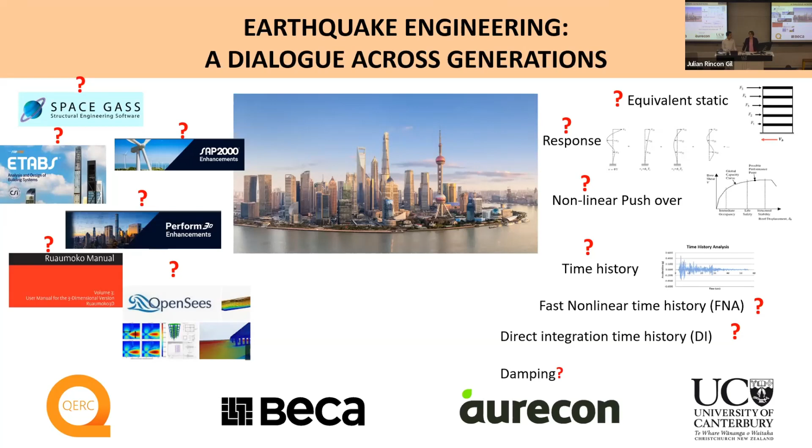There's one interesting thing here: it doesn't matter which method or software you choose for the analysis, at the end you can find a very nice, beautiful result. At first look you think, oh, it's stunning, it's great. It looks more accurate if you use a more complicated analysis. But I can say that it is scary, it is dangerous, because there is a chance that the first principle understanding was wrong. But because the results look beautiful and complicated, we think that it is correct.

So using software these days is essential, we need to use it. But the question is how can we make sure that we are using it correctly.

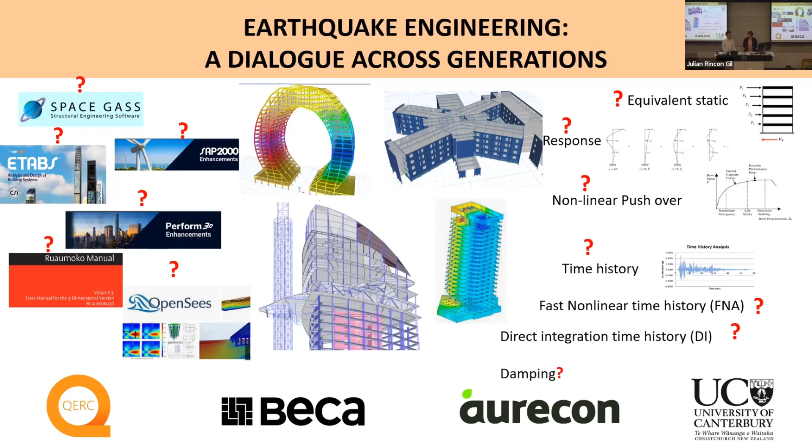So based on what Professor Paulay mentioned in his interview and what Niku just explained nicely, we want to open three questions to the panel and later for the audience. The first one is, as Niku said, no one can deny or question the role of computer software in today's earthquake engineering. But the question we need to ask ourselves is: have we equipped our engineers with the necessary knowledge and tools to properly use the software, but more importantly, verify the results and make sense out of them?

The second question, also tied back to the first, is I want to know what the panel thinks about these unconventional yet simple analytical methods that Professor Paulay was referring to in his interview, and several other researchers and engineers also advocate. Could adopting such analytical methods, which provide further insight into the seismic behavior of structures, help prevent or at least minimize the so-called misuse of computers in earthquake engineering?

And the third question, touched on by Professor Paulay at the end of his response, is the role of philosophy in earthquake engineering, something we don't often talk about. We have been focusing mainly on improving our technical capabilities, but have we invested enough in understanding the philosophy behind each of these techniques?

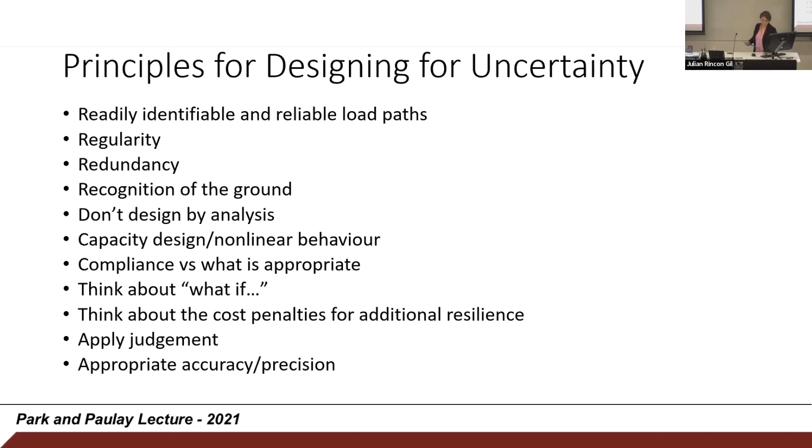Emeritus Professor Dave Elms has a long connection with the University of Canterbury, where he made a significant and lasting contribution for 40 years. Professor Elms was born in London and completed a Bachelor of Arts in Engineering at University of Cambridge. He then worked in structural dynamics at the de Havilland Aircraft Company. Dave undertook a master's degree in geomechanics and a PhD on the behavior of shell structures at Princeton University in the United States. In 1964, Dave took the role of lecturer in civil engineering at University of Canterbury. He stayed with the university throughout his career, winning the chair vacated by Professor Harry Hopkins and established a systems engineering program. He served as dean for the School of Engineering and took a lead in the establishment of the Center of Advanced Engineering.

He made notable contributions to the growth of risk-based engineering in New Zealand. Professor Elms has contributed extensively to journals on his area of expertise. He also undertook consultancy work, including for the Ministry of Works and government projects, such as the Prime Minister's Special Committee investigating the safety of nuclear-powered ships.

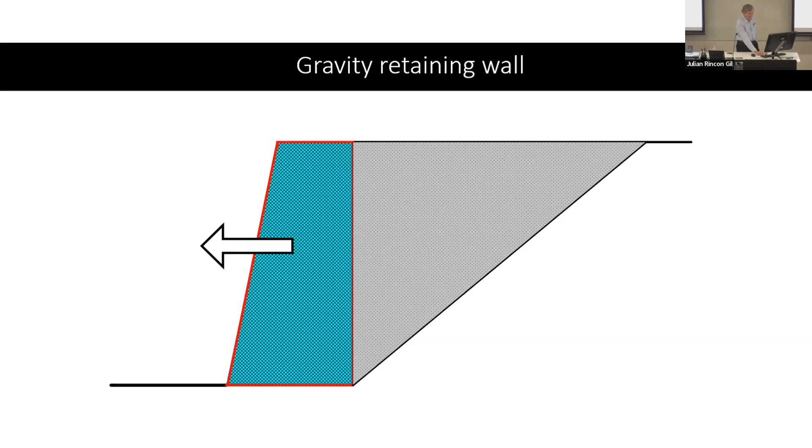But the Ministry of Works did not know what to do. They said, 'Look, we're trying to write a code of practice for this, and the trouble is, we don't know how to avoid failure—every time we do our analysis, we get failure. So we put some more mass on, but the more mass you put on the wall, the more it fails. We don't know what to do.'

So I worked with a friend of mine in America, Toby Richards, on that. And the problem in that slide is that word 'failure.' What the devil did they mean by failure? They thought they knew what they meant, but they didn't actually know. Now, a good engineer will realize that, but it's all too easy to take ideas, words, and just say, 'Oh, we know what it is,' because of familiarity. Familiarity does not mean you really understand it.

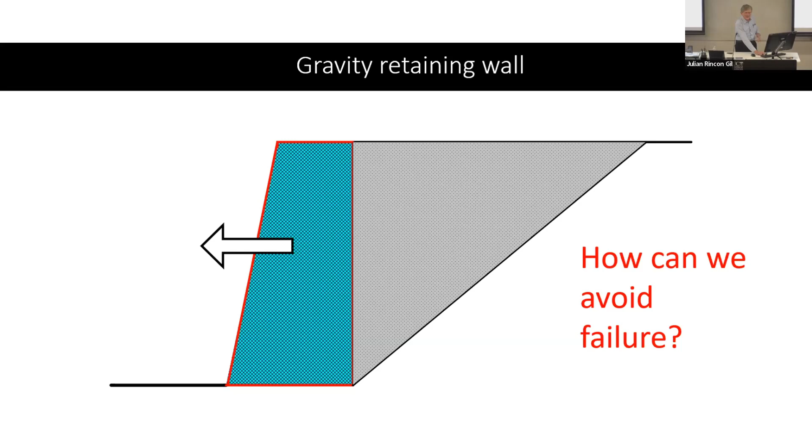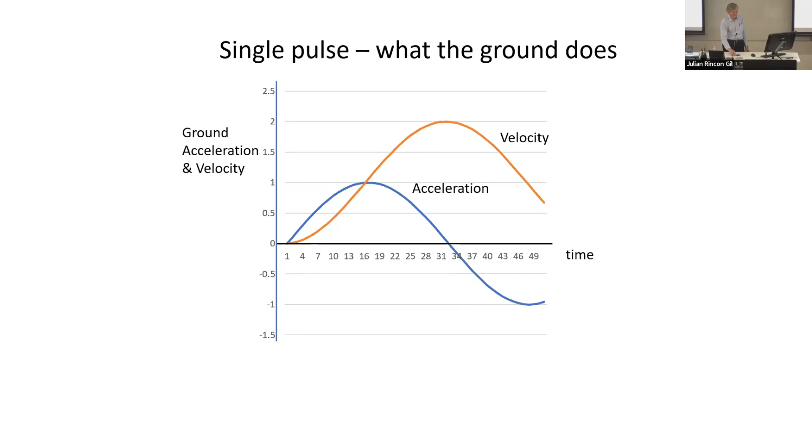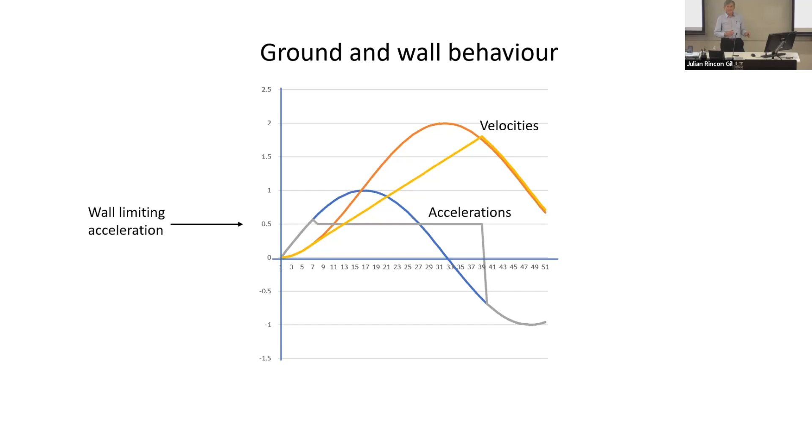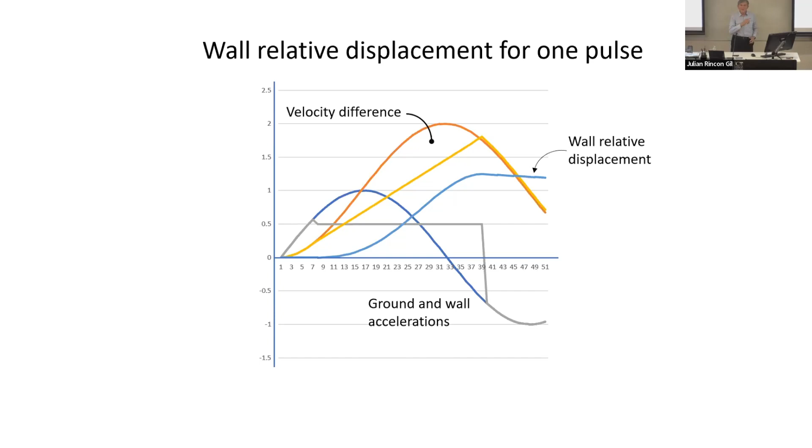That's what you've got to look at, the movement, not a catastrophic failure. So the result was we can calculate the relative displacement of the wall or an embankment or anything similar for any earthquake trace or collection of them, and we came up with a design approach which simply said, suppose you have an earthquake typically with a maximum acceleration, maximum ground velocity, and you have certain characteristics of the soil. You can have an equation trading off the mass of the wall and the amount you allow for movement. So you design for the movement.

I don't think that was picked up much in New Zealand, but certainly in Washington State, they have a lot of earthquakes up in Seattle, and they said, okay, we'll use this method. And so they do. They have a lot of freeways and big retaining walls. So the result was a new meaning of failure.

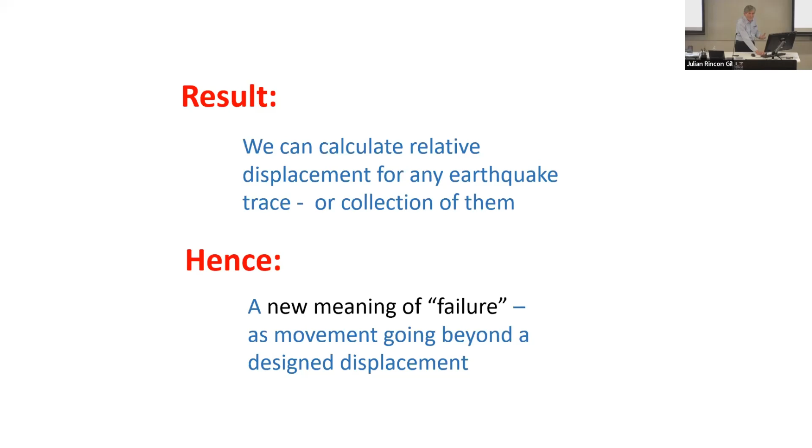What did you mean by failure? As movement going beyond a design displacement and a different design philosophy. That is more real than, it is going to fail. So that's one example of faulty thinking. Thinking you know what you mean by a perfectly familiar word, failure. Look at reality, not at an assumed and inappropriate model.

Okay, resilience and risk. In a way, they're kind of complementary. I worked an awful lot on risk, and risk is a wonderful thing to work with, but be careful, there are three things wrong with it. Firstly, major issues are sometimes omitted. I've seen large organizations go through because despite all their work on risk management, there's something they didn't take into account. A black swan, a thing which doesn't exist maybe, or maybe exists very rarely, came along.

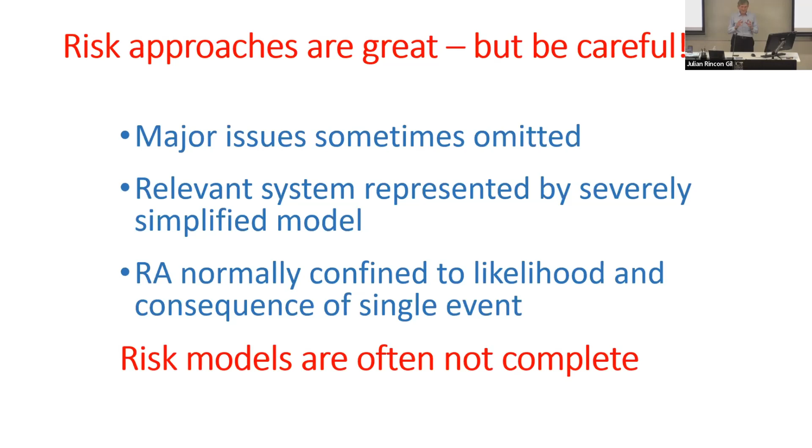And that was the end of the business. So major issues are sometimes omitted. The relevant system usually, because of the complexity of good risk analyses, is represented by a severely simplified model. So watch that, the difference between the model and the reality. And risk analysis normally is confined to the likelihood and consequence of a single event. So risk models are often not complete. This is not to knock risk models, they're wonderful, they're very, very useful, but be aware of their limitations also.

With regard to resilience, it's a different matter. First of all, let's say a system is resilient if it can survive a major incident and regain its functionality, whatever it happens to be, structures, whatever, the city. Risk focuses on an incident. Resilience focuses on a system's behavior. Now, I've said there extrinsic versus intrinsic. What do I mean there?

Well, in a way, the risk thing is, let's look at this: there's an earthquake coming along, it's going to be of such and such a size, this is our structure, what's going to happen? Resilience takes the part of the structure and says, we don't know what's going to happen, but we're going to make sure we survive. So it's a very different attitude.

So again, coming into that is a question of a need for a rather different way of thinking. The extrinsic is the way that scientists think about it. The intrinsic is the way that good engineers look at how a building behaves.

Okay, basic resilience concepts are degree of impact, what's the initial damage, and the recovery, the amount of recovery, how much it's recovered, the time it takes, because time is money, and the trajectory. So these are things which risk doesn't have with them. The recovery time is central to resilience because of the community costs very often which are involved.

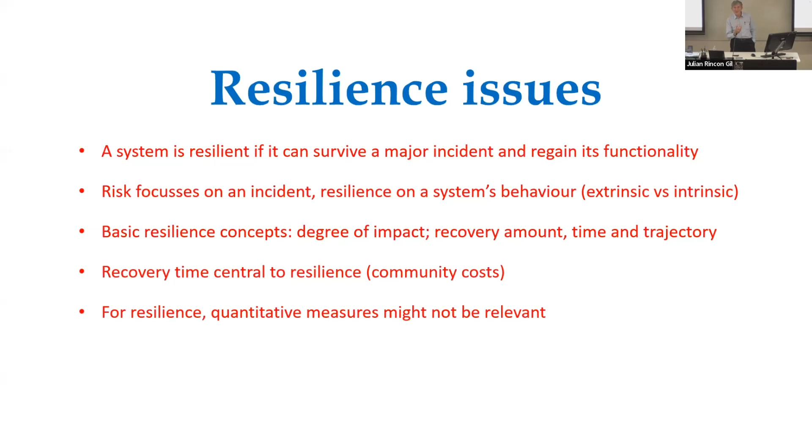And for resilience, quantitative measures might not be relevant. It's much more important to understand what's going on. Okay, let me give you an example.

We had this question. I was working with Ian McCahon, a geotechnical engineer that many will know, and Rob Dewhurst. And the Lifelines people on the coast came along to us and said, how can we improve the resilience of our infrastructure? Now, this is a rather large ask, you know. It's 700 kilometers from the top end, right down to the Cascade River. And there are so many thousand culverts and many, many bridges and roads, communication links, power, water supplies, on and on and on. How can we improve the infrastructure resilience?

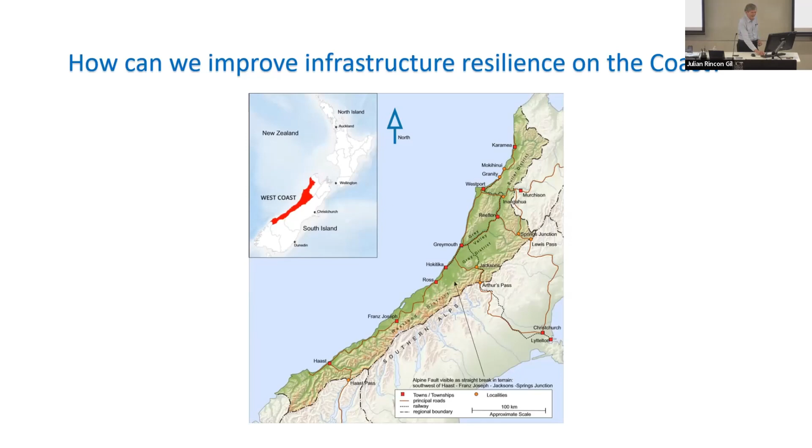Okay, we can do it, we said, a very big job. So we simplified it as carefully as we could. We modeled it as 29 system elements. I don't expect you to read all those, just to say that step one is to make it handleable from an enormous thing. One of these elements might be a road plus a communication link which goes on the road, plus this and that and the other, a multiplicity of things all at the same place. This is certainly true of bridges, of course, which don't just take vehicles over them.

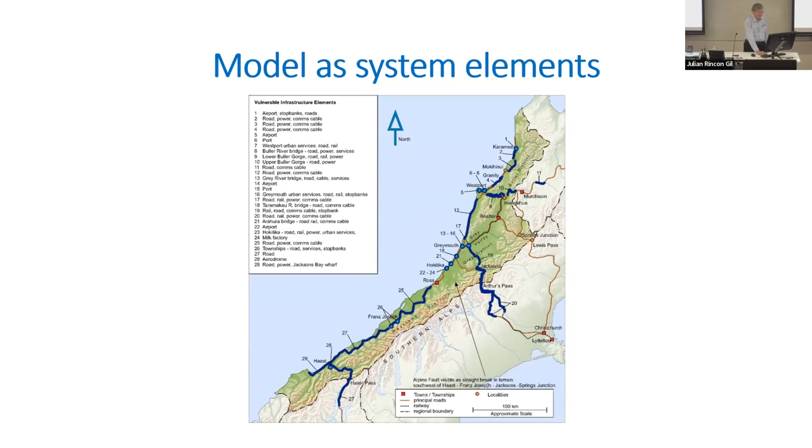So we worked away at this, but how are we going to deal with the resilience issue. These people wanted to know, what do we do to improve resilience? Well, the trouble is, what's a measure of resilience? There's no really agreed measure for resilience.

But anyway, we'd start with the vulnerability of something, the vulnerability of a bridge, let's say, that's one half of it. The second is the significance. The bridge might fail but not affect anything, or it might affect the community very much indeed. So the significance and vulnerability both come into the part that piece of infrastructure is going to play.

Just like a heap of dirt, if you drive past Jackson's on the west coast, a heap of dirt comes on the way to Lake Brunner. And it's actually a stop bank to stop the often very large river, the Taramakau, going down into Lake Brunner. But the likelihood is, if you have an alpine fault earthquake, the river end is going to go up by 1.5 meters. It's going to shear through the stop bank, which is about, I'd say, maybe 300 meters from the river before it goes down its old historic path down to Lake Brunner, catastrophically.

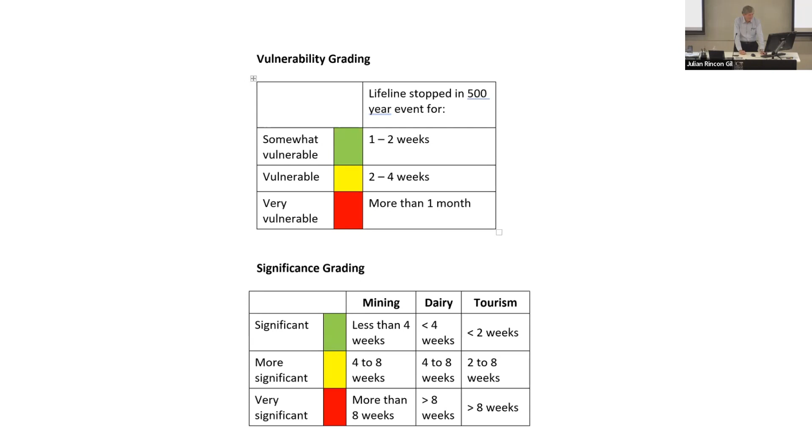Here's something we produced, which was the vulnerability grading of something. We simply said, whatever it is, that stop bank, is it somewhat vulnerable, is it very vulnerable, or what? And we're looking at a 500-year event and saying this lifeline is stopped from operating for this length of time. So that gives us a sort of feel for what you mean by vulnerability. Likewise, significance for mining and dairy and tourism, what happens? Is it going to knock things out for 8 weeks or more than 8 weeks or what? So this way we were able to come to some sort of answer.

Okay, that is an example of the difficult thinking we've got to think about, and the importance of the reality thinking that we've got to think about when you're dealing with a very complex, very large resilience problem.

And finally, recovery. Now, I always think of the fact that after an earthquake you've got 3 phases. The response, rescue people; the restoration, get the water supply on, and things like this; and the recovery, everything is back to a new normal. Now, there's an awful lot of work done on the response and on the restoration, done much of it myself. But the recovery, not much at all. And that's where the money is.

We had a wonderful example here in Christchurch with SCIRT, the Stronger Christchurch Infrastructure Reconstruction Team. What was different about that was that it was an alliance approach. It's a management, an engineering management approach by which 3 owners, the government, NZTA, now Waka Kotahi, and the city council, and 5 big contractors all got in a room. The door was locked pretty well, and they were told, come to some agreement as to how you work together collaboratively.

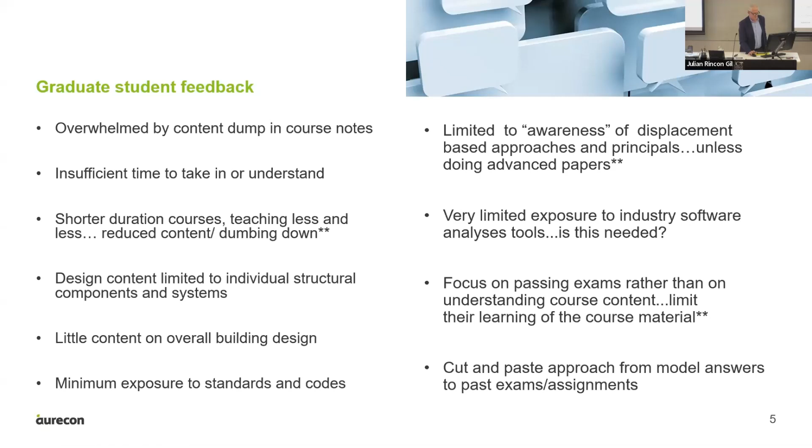More positive feedback from postgrad courses - the masters in particular, they were pretty positive. They felt they learned a lot more. It was more specific to today with all the new systems, the new approaches, and they had the time, they felt, to learn the material.

I also canvassed, as well as my own views, one or two more of the senior people in our business about their perspective of the new generation of engineers entering the workforce. Again, probably the key issues here: getting a good grounding in structural engineering, the basics of structural mechanics and earthquake engineering basics - but the view is it's probably a bit narrow, not excessively broad. They have some general knowledge about structural systems, but there are a lot of shortcomings. Broader knowledge of overall building behaviour was lacking - in particular, the ability to conceptualise and configure structural systems to a building.

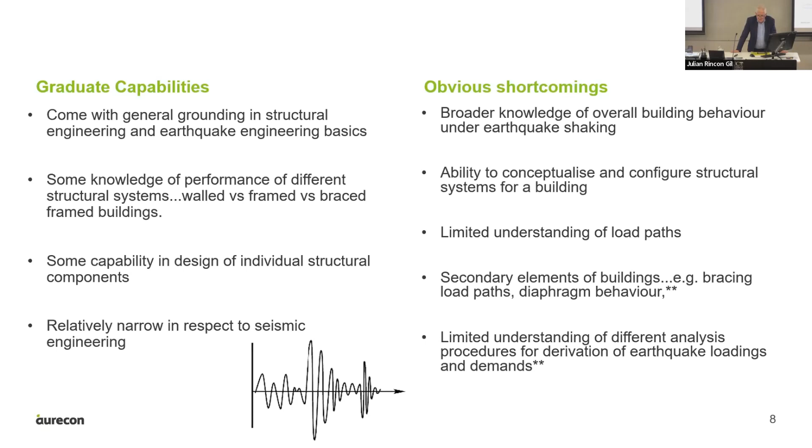And they certainly had no understanding or very little knowledge about secondary structures - things like diaphragms perhaps, but also mezzanines, roof structures and the like - and limited understanding of structural analysis methods, all the options.

Postgrads, again, thumbs up, as you see. Stronger knowledge - they were getting exposed to software and other tools. They had better understanding of building behaviour. The only minor point is occasionally there's a bit of PhD bias coming into the design office about what is appropriate and why aren't we doing this, or why should we be going down this route.

So what are the demands that the consultants are putting on the new generation of engineers? We're expecting increased level of technical capability. This has been driven by more demanding and detailed analysis to demonstrate compliance of design.

It's really as a result of more of the recent earthquakes that have occurred and how we need to demonstrate not only the primary structural systems, we've got to demonstrate deformation or force capacity of secondary systems and the like. And part of it is being driven by the peer reviews as well. So there's a lot more effort going into designs than there were yesterday. The idea that, oh, that'll work, don't worry about it, that's gone.

We're also adopting more complex and resilient building systems, low damage design and the like, and they require a lot more analysis and effort. And we are asking how young engineers get involved in detailed seismic assessments. DSAs are still a good revenue stream for a number of consultants, and we're expecting some knowledge around that, and we don't necessarily see that.

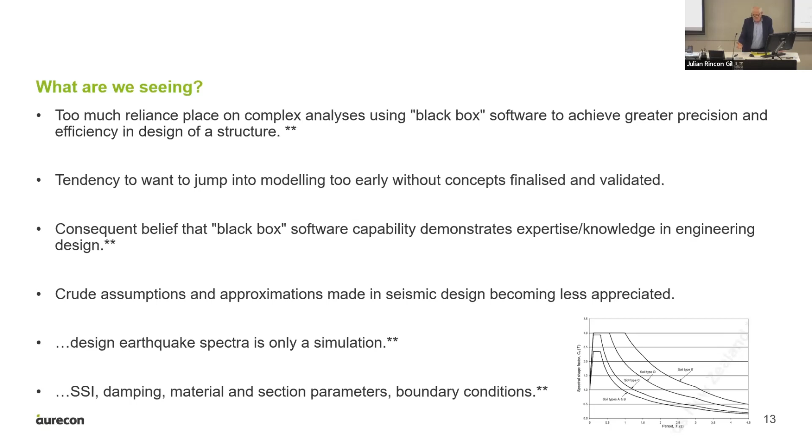It's created a culture that has turned the whole design process into an analysis exercise, rather than the analysis being a tool to support design and help verify the design. And many of the basic principles and subtleties about our modelling analysis are certainly being missed and not appreciated.

Examples are when we use pre-processor inputs - there's a lot of assumptions made in regard to modifiers and the like. Often they don't understand this, right? Choice of types of members - we see elements here with people put in walls and slabs, shells, structures to get the interaction. Never understood, right?

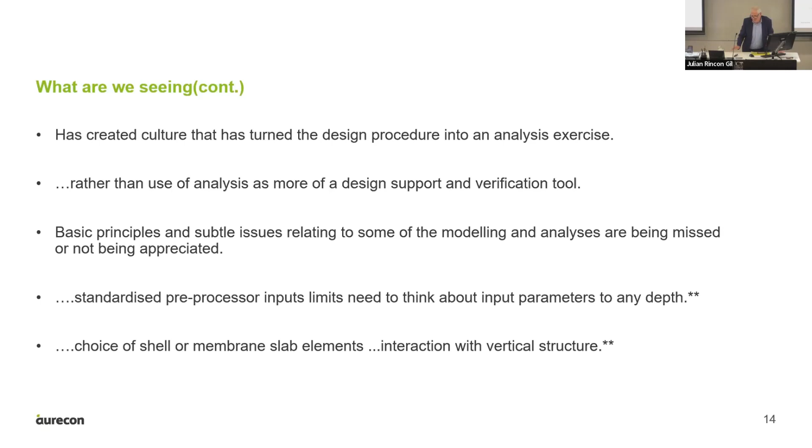Basis of moment curvature - we know what basis of moment curvature is, but there's an assumption that it covers everything - shear deformation, bar buckling, everything else. Well, can I say that's a load of bollocks? But that's the assumption by some people.

And obviously design spreadsheets, very common. We use verified design spreadsheets. People get them, they jump into it. They actually don't know what the basis of what modelling is of the analysis. They put the input, they get the answer. So as I said, there's a loss of the broad ability to conceptualise, understand overall building or system behaviours, right, without reliance on the computer.

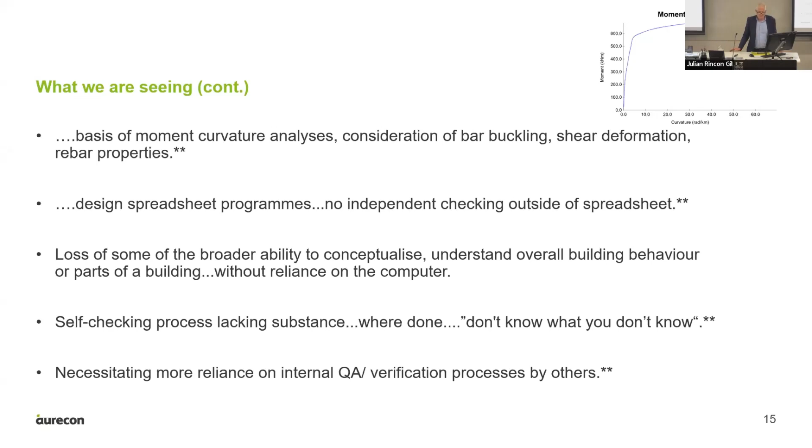And the self-checking process is very questionable. The issue is you don't know what you don't know. And as a consequence, we find we're spending a lot more time often in the formal verification process at the end of the design, trying to sort out issues which weren't picked up during the design process. So one colleague said to me, the quest for high technical capability—read that software capability—is reducing the ability of many engineers to critically review the analysis outcomes from software.

I just got some examples of clangers. You can read those if you like, but the takeout, these are ones I've seen over the last not that many years. I'm sure many of you as well have seen these sort of mistakes and errors. And sometimes your jaw drops. But where was the self-checking? Where was the reviews that should have picked these sort of things up?

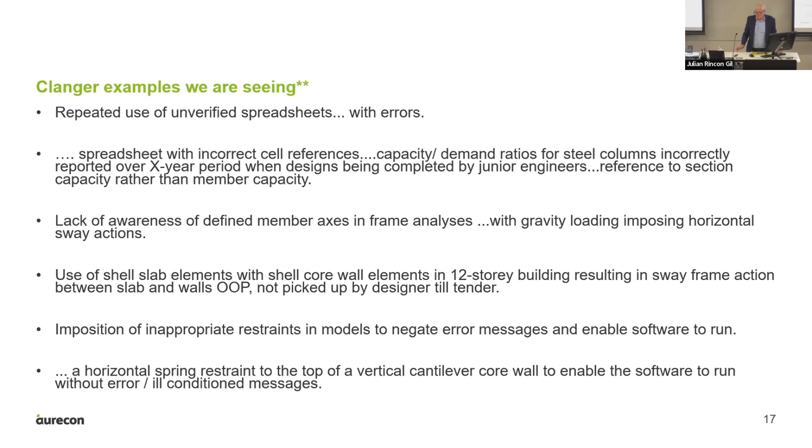So responding more to the questions directly, how do we ensure the first principle understanding of structural behaviour is not lost? This is really driven by consultants. It's the compliance with the consultant's mandatory delivery methodologies and procedures. These aren't new. These are in place in most design offices. It requires a formal review process right through the whole design.

So we ensure that the black box software is not used without critical review. We're expecting our engineers to review the proposed structural system, define the expected behaviour, verify through hand calculations that it is a valid system before they start modelling.

And we need our senior engineers looking over their shoulder, critiquing the work, providing advice and direction, setting expectations on the self-checking, the sense checking in particular—what they're reviewing, ensuring that the output, the moment profiles, the periods, the displacements are what we expected from the earlier work. And this requires some hand calculations. It requires a knowledge of the assumptions as well, what was being used.

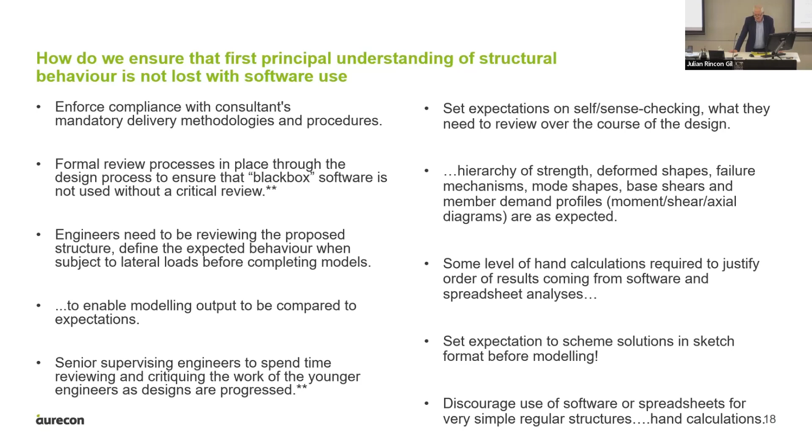Ideally, we'd like to discourage the use of software in all small types of projects, so people get back to the first principles, understand them and pick that up. However, it's not always that feasible.

So how do we ensure our engineers are equipped with the tools to verify software? Again, that's driven by the consultants, supporting the professionals. And it depends on the process they have in place and the programs they have in place. So you'll find that many of the larger consultants do run technical sessions and in-house courses. We are aware that some of the small consultants struggle with this and rely more on external seminars and the like.

We also look at formal accreditation processes. Should we be putting in place internal accreditation that people are competent in this sort of analysis, understand the assumptions, understand the output, and therefore it actually was one of the drivers in selection of those engineers on certain projects.

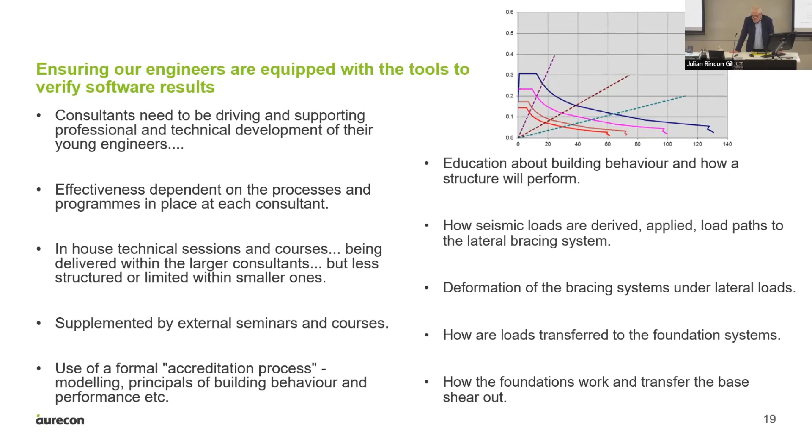Now, we also talked about what are the tools, simple analytical tools that could be used for assessment and for design. Is it feasible to consider displacement-based design and the like? We know that displacement-based design is already advocated for building assessments. It's commonly used by many consultants, be it a nonlinear pushover analysis or displacement-based analysis, and it's quite a useful tool. It brings a first principle approach to it. You can actually, from the element detailing, determine the curvature or the rotation capacity, the ductility, pretty straightforward.

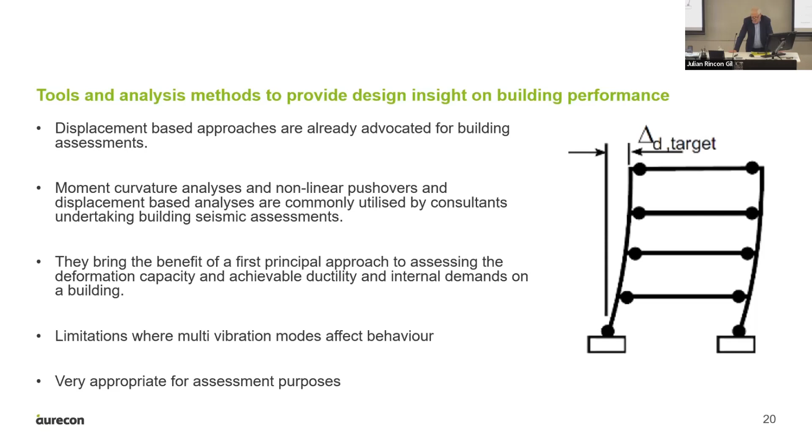However, it has limitations with multi-vibration mode effects affecting behaviour. But it is quite appropriate. Whether it's appropriate for new design is the question. It hasn't really gained traction. I know it's only used in the transport industry in the UK and USA. I'm not sure where else it's being used. The problem is partly, I suppose, consultants are familiar with the force-based design approach. The material standards are written around that, so you have detailing provisions of the material standards which ensure that's achieved.

How there are proposed approaches to address higher mode dynamic effects—Nigel Priestley's displacement-based design book has an approach, and I think it also covers P-delta. But have these been adequately tested, and are they accepted? I can't comment. It really is, in some ways, a very similar empirical approach, perhaps, to force-based design. It does provide good understanding of displacements, of stiffness and period, but it doesn't provide accelerations and the like. You end up going back to get a force distribution to use for the design. I'm happy to hear people's views on this one.

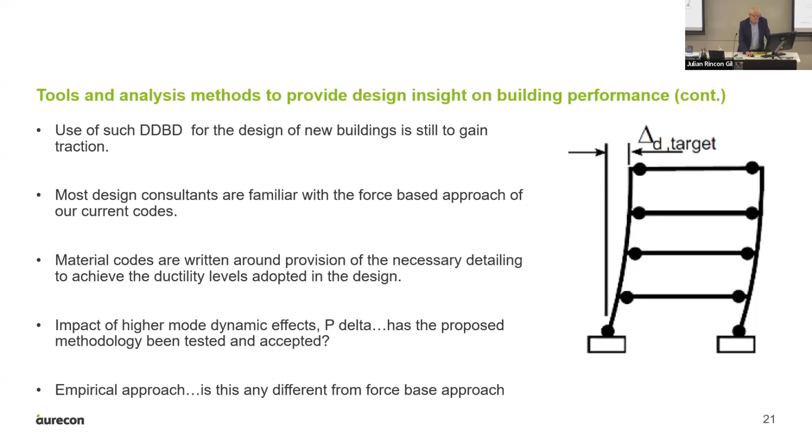So have increased technology been matched by understanding of philosophy behind these? There's been some views of that shared with me. Some feel no—again, it's dependent on the in-house training in the programs of the engineering consultants.

We talk about low damage design, floor diaphragms, seismic assessments, modelling approaches. And there is support outside in the industry as well through guidelines issued through professional bodies, and there's always the learning-on-the-job approach.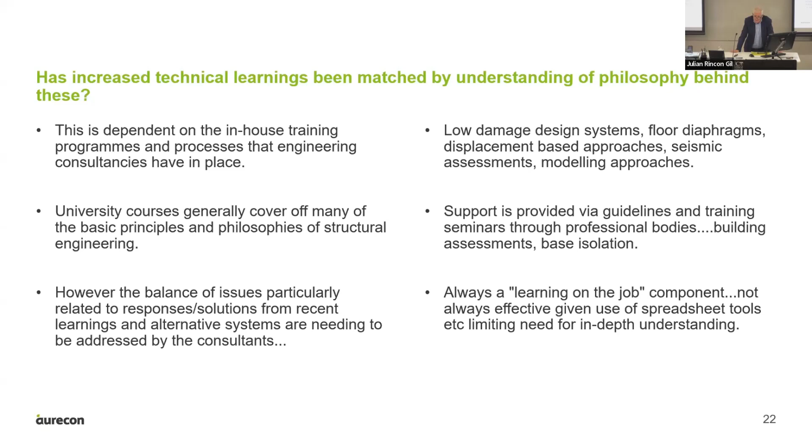So how can universities contribute? We could ensure that the courses provide greater emphasis on building concepts, overall global behaviour and response, and drive this wider lens on overall behaviour. That, according to our grads, is really missing in the courses.

Look at introducing the use of some of these analytical tools to help understand the principles behind element performance, how they behave. Introduce the concepts of other types of analysis, non-linear behaviour, displacement.

Also, we do know that everyone's learning a bit of static analysis at university. They do it in their last year, but there's very little knowledge around these other methods, response spectrum, non-linear time history. Non-linear time history is rather specialised, and we wouldn't necessarily expect people to pick up on that.

One area I always recall from my days at university, in the last year, we had a program where a senior design consultant came in and presented real-life building examples that the company had designed, and took us through how the structural solutions were adopted, why, how they're integrated into the building, the load paths, primary and secondary structural systems. Some of my mates said it was one of the best courses they'd had.

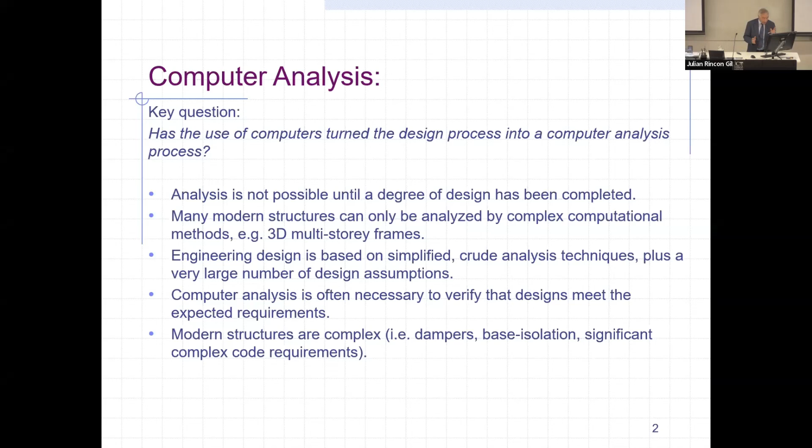As I say, computer analysis is required in many cases today to verify the design that the engineers have put together - I hope not by the computer, but to make sure it actually does what you thought it was going to do. Modern structures are very complex, we have nonlinear behavior, base isolators, dampers put in them - all those things mess up the traditional simplified analysis techniques. We've got a paper coming up for the bulletin which is actually going to pull holes in most of the analysis techniques used in modern design. The mathematics is wrong. I'll leave that point at this stage.

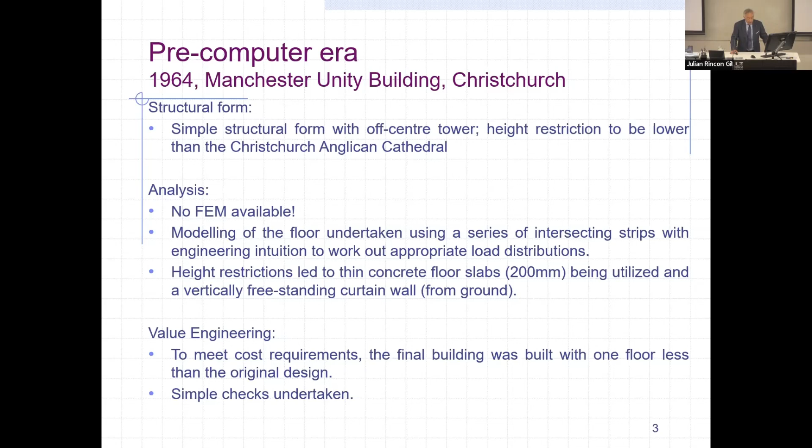I went back to the beginnings, before computers. So we're going to take a structure, we'll go to the slides, I can talk to the slide. This is the building - this is before we had any computer analysis.

Finite elements for slabs would have been a marvel, but what did we have? You've got slabs in 2 directions with cantilevers hung off cantilevers - it's going to be pretty stressed. We were limited: the height of the building must not exceed the height of the cathedral, so we're limited to 200mm slabs. We had to have 43mm cover to the ducts, top and bottom - doesn't give you much room to play with. We had a 10-metre span between the columns and the tower. It's not a nice structure - the tower's off to one side, and we know that's bad news to start with. But if you want the tower in the middle of the building, you can walk around it - you couldn't do much else, so it wasn't really an option. We didn't know much about, at that time, shear in what is a box.

In the earthquake, the real damage was in the spandrels between the windows. The building could have been repaired, but the problem was you probably couldn't lease it. It was designed with one toilet per floor, alternating male, female, etc. They were hoping to attain the adjoining site, put another tower up on the back, a building on the other side, and maybe get a workable structure, but it wasn't possible. As I say, it's a very thin slab.

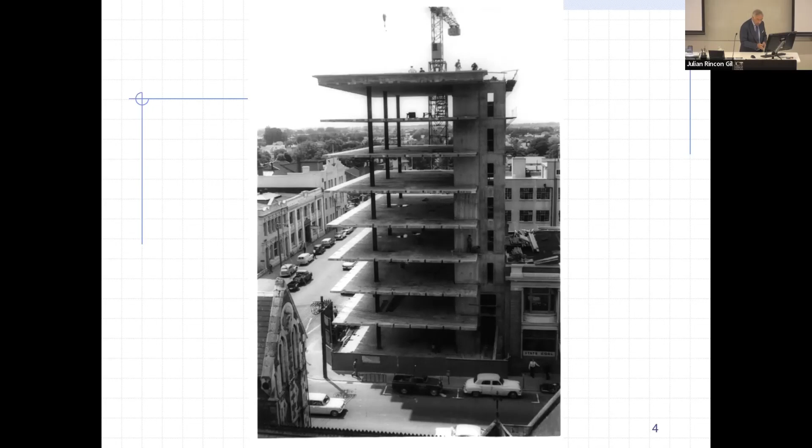That's the pre-stressed lift slab. It's the only really big lift slab building that's ever been built in New Zealand. You see the pre-stressing tendons in both directions. Some of them were single-ended, with a return anchor to that end.

It was an interesting structure. We actually did contemplate what would happen in an earthquake while they were lifting it. As far as I know, the system was never set up. I wasn't in New Zealand when they actually built the building.

I presume they just hoped not to end up with a lot in Worcester Street. That's an aside. There was no basement; all the heating and ventilating is in the roof. The foundations—we knew there was nothing solid to at least 10 metres down. One of the piles went down 7 metres on the first blow, so it's fairly soft material.

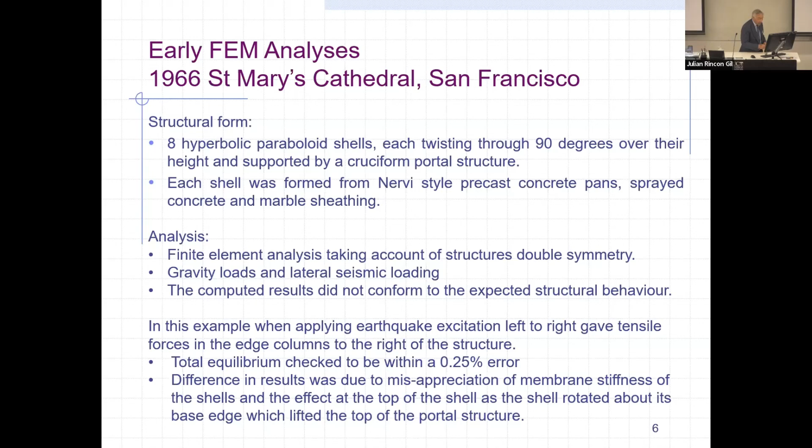It's a structure of double symmetry. That's what's shown here, St. Mary's Cathedral. There's a cruciform portal frame, if you like, and there are the 8 hyperbolic paraboloids forming the roof.

There was a computer analysis, finite element analysis, and the answers weren't what was expected. We spent about 3 weeks arguing about what was different and why. People like Professor Scordelis, Professor Rayfield, and myself—I don't think Ray Clough was involved in this one—tried to work out what was going on. We checked equilibrium; it was within 0.25%, and on the computers at the time, that's doing fairly well.

The problem was that when you put an earthquake in this direction, from left to right, we were getting tensile forces in the portal frames on the downwind side of the structure. What on earth is going on? It's not what you expected—you expected compression on this.

What was happening was this shell is running along this base edge, and as it's moving sideways, it's rotating about that baseline. The shell is lifting the portal frame up, and that's why you get the tension. The forces are actually coming down through the shells, not via the frame. Once we resolved that, we realized there was a thinking process that was wrong, and we were then very happy with the solution.

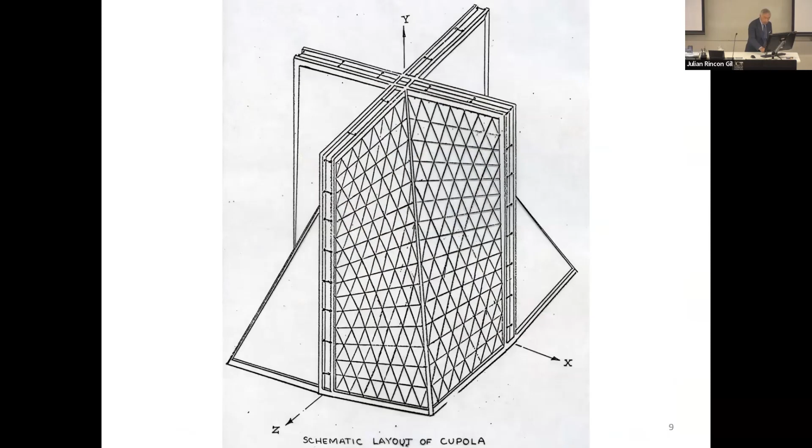It's the inside of the Nervi panels forming the shape of the shell structures, with a diagonal beam connecting the two hyperbolic paraboloids. We used the double symmetry of the structure to make a simplified model. That's the form of the Nervi panels, precast concrete units covered with sprayed concrete, and then a thin concrete panel with a marble facing fixed on top. That's where the white surface comes from.

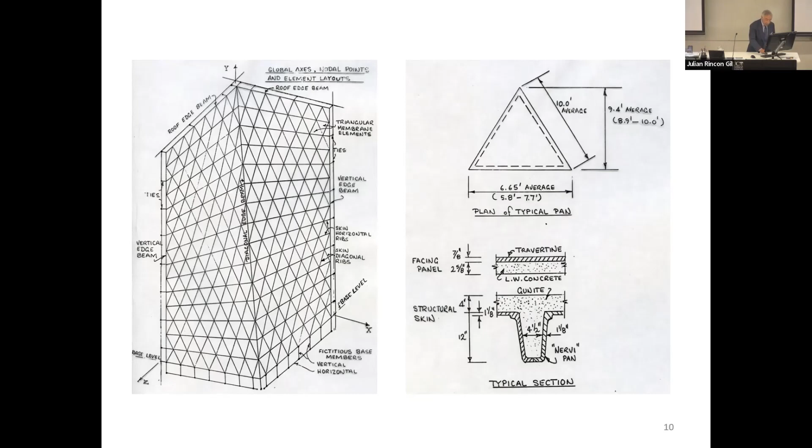It was an interesting exercise, this early finite element analysis. One important point at this stage: all the early finite element analyses, done at Berkeley or anywhere else, for the re-entry vehicles for NASA's early spacecraft, was done by people who knew what they were doing. They were finite element people, they knew how their programs actually worked. So where were the limitations? When is it not going to work? They also knew about finite precision arithmetic, and I think that's what's missing with a lot of our modern engineers. Computers do not do exact arithmetic, and if you're not careful, you can blow your analysis out of the water. Putting dummy stiff members in is the last thing you want to do.

At the 2017 earthquake conference there was a presentation by CSI about difficulty with some analysis. They were modelling plastic hinges with very stiff members which later yield, because they had fun with the damping models. But I had to say to them, this is the most inept way of modelling a plastic hinge that I can think of. After this paper was finished, they disappeared, so I don't know. I probably wasn't very popular. At that time, computer programs were very simple.

Computer memory was about $1 per byte at that time, so memory was very expensive. Most computers didn't have very much. Disks weren't very well organized either, a lot of people were playing with blank tapes. The early versions of SAP had, I think, nine tapes, with rewinds, backwinds, backspacing, etc. There were no graphical user interfaces. Input data was punch cards, output was a line printer. If you had graphical output, you usually got it some days later, because they had to be plotted, etc. And manuals were a bit cryptic. They wrote the program and thought, well, maybe we better have a manual. So the manual was an afterthought.

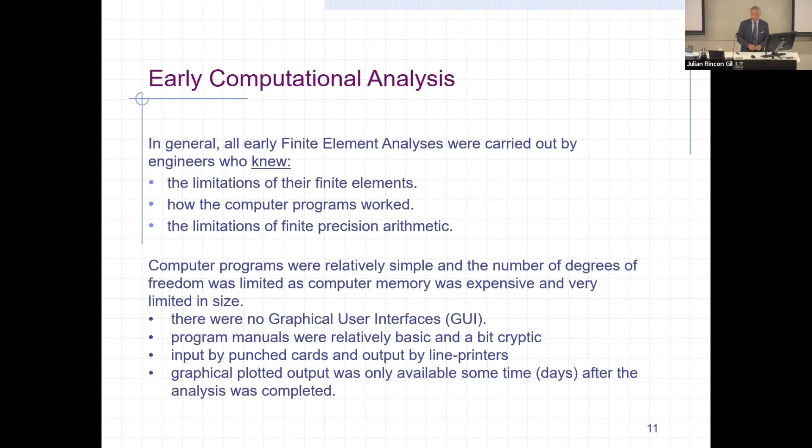What we later decided, when we wrote a book on how to write programs, was that the first thing you actually wrote was the user manual. What are you trying to do? What information do you want? What information do you need? So you write the manual, you might have to rewrite it, but you write the manual first, then you think about writing the program. At least you get things around the right way.

Misuse of engineering software. I made my comment about knowing how the elements work, etc. We've got CTV as another example in New Zealand, but I'll leave that one aside at the moment. That really is, again, a case of people not knowing what they were doing, not understanding the model. But the best example I can think of is the Sleipner incident in 1992 in Stavanger.

They built this large concrete platform. That's what the Sleipner platform is meant to look like. In the process of getting the superstructure on top, they had to ballast the platform so that the bottom was at 99 meters below sea level. The platform was actually all superstructure on barges, a steel superstructure. They were going to float it over the top of the platform, deballast the platform so it lifts the superstructure off the barges, etc.

Except they got it down, and as they were about to bring the superstructure over the top, there was a large bang from down below. What had actually happened was that a failure in these tricells here had let seawater in, so you got up to 99 meters of head on the piece of shell. Eighteen minutes after the first bang, the platform sank. Four minutes later, it hit the bottom of the fjord and imploded. It was recorded as a magnitude 4 earthquake, that's how much energy was released. They converted 75,000 cubic meters of reinforced concrete structure to rubble on the seabed in 22 minutes flat.

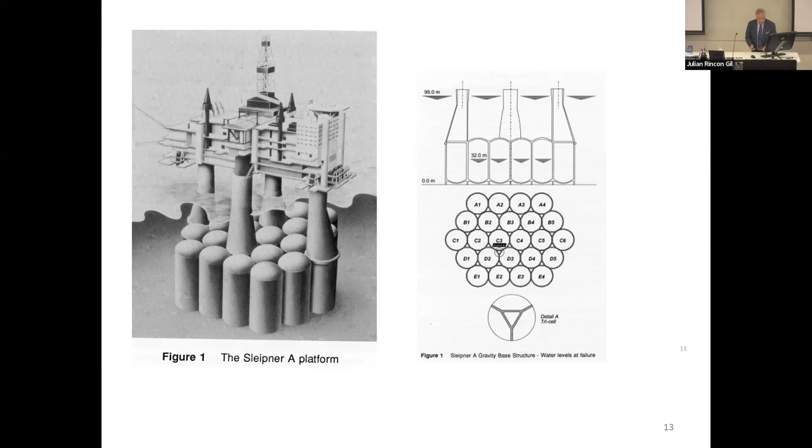What was wrong? Well, let's have a look. This is a typical piece of example, this is the tricell here. This is seawater, this is maybe air or some water in it. And so you've got high pressure in that wee triangle.

And this is the computer model that was used, or part of the computer model that was used to analyze that tricell intersection. Now, anybody who's played with finite elements knows it's an extremely crude model, it's also very poorly shaped elements, particularly when you think about what sort of element they are. In 3D, they're probably eight-node hexahedra. But the other thing you have to think about is that effectively it's a fixed end beam with a uniform pressure on it.

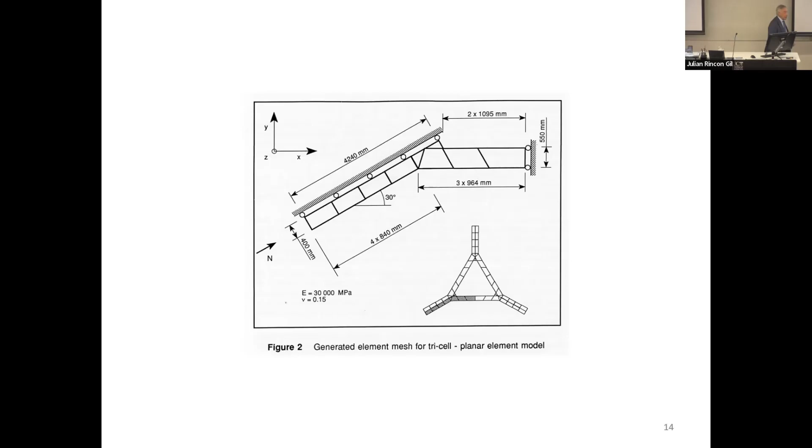So what actually happens? Well, there's several things that went wrong. For a start, you have a beam with a uniform pressure. What's the shear distribution? It's linear with distance, isn't it?

What they did was they looked at the results and plotted them, using symmetry. This point here has an image down here, and they had some values averaging in here. They put a parabola through those three points and said, this is the shear we have to design for. If you actually look at the real piece of material with this uniform pressure, what they should have had is a shear that's way up here. So they weren't thinking about it.

So bad finite elements, bad analysis, bad interpretation. It's bad thinking about checking this.

The same goes for the bending moments. It's a uniform beam. You've got WL squared upon 8, which is 2.12 meganewton meters. They again had point A and point B, which was by symmetry, point C, then drew their parabola through and computed a moment. You find that what they've got is 85% of the static moment on the system. So again, they weren't thinking. They weren't checking against the real structure.

One of my initial points that didn't show on the slide was that all of our analyses are on a computer model of the structure. It is not the real structure. If you don't realize that, then heaven help us.

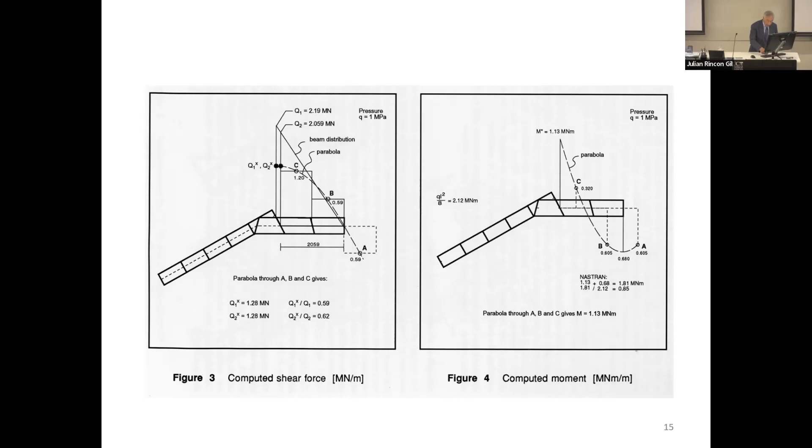Going back to my slide, the other point was that based on the results of those analyses, the actual detailed design was also horribly inadequate. In other words, they carefully lined up all of the holes in the Swiss cheese, and the disaster was the result. The contractor, a Norwegian contractor, was the biggest construction company in Norway.

They found out their mistake, redesigned, and the platform went out to the North Sea on schedule. But at the end, there were three people cleaning up the paperwork in the office. It had taken the total company assets to correct the mistake. So if you get it wrong, somebody's not going to be very happy. So again, that was the point I wanted to make there.

It's just that you have to know what you're doing and understand the modeling that you're using. And look at how do I check? What verification techniques do I have to verify that I've got the right answers? If you don't, then you're in trouble.

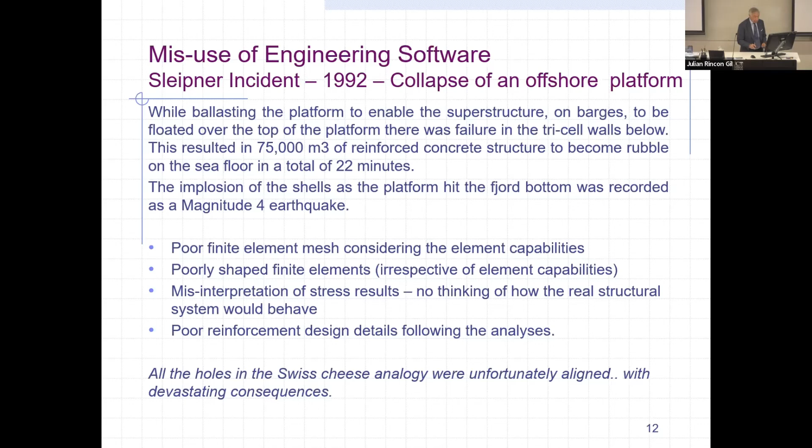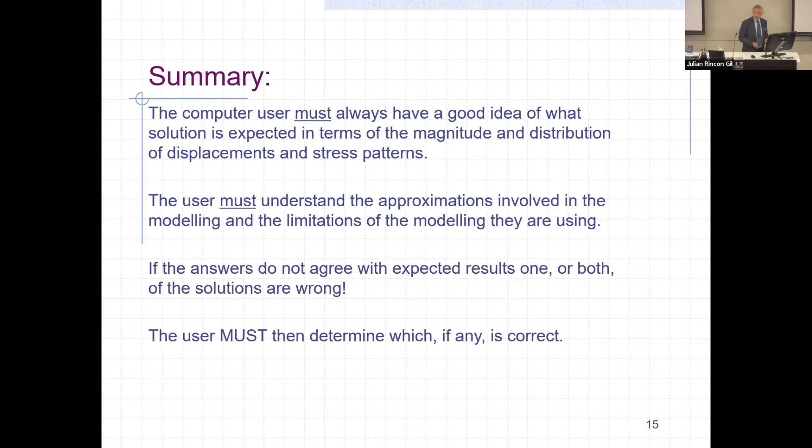So, as I say, you must understand what you're doing, and you must have a good idea what solution to expect. I don't care how you get it, hopefully by some other method, hand calculation, crude estimate, doesn't matter, it gets you into the right ballpark. You've got to understand the limitations of the approximations that are in your model. And if the answers are not what you expect, then one or both of those answers is wrong, and you better find out which one. That's your responsibility.

Time history analyses, real fun and games. There are so many things you can do wrong, and I won't go into all of them, but you've got choice of ground motions. If you want to scale them, you can get any numbers you want, just by thinking about the different ways of scaling it. Which earthquakes do you pick?

If you're doing time history integration, most of the implicit schemes in use are based on the textbook incremental equilibrium model. They do not check equilibrium, and in fact most of them can't. If they don't compute the damping actions, you have no shot, and most programs don't compute the damping actions. Then there's the question of what the damping model is.

You must understand the member models, finite elements, beams, curvature, whatever, member properties, and avoid dummy stiff members. You're losing precision straight away. I think David Elms will remember analysing pile dolphins for Picton Harbour, where we pushed on the pile dolphin that came back to meet us because we'd lost precision.

Not a lot of things to do. Hysteresis models - which ones are appropriate, etc. Mass representation, usually not a problem. Rigid diaphragms is one that's come up in the last couple of years for work we've been doing. In some cases, we get away with it. Other cases, you go back and do your design again, because in fact rigid diaphragms are not applicable in this structure.

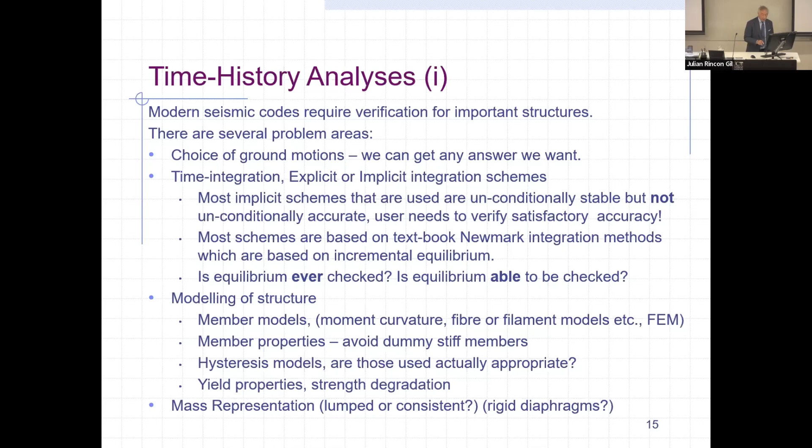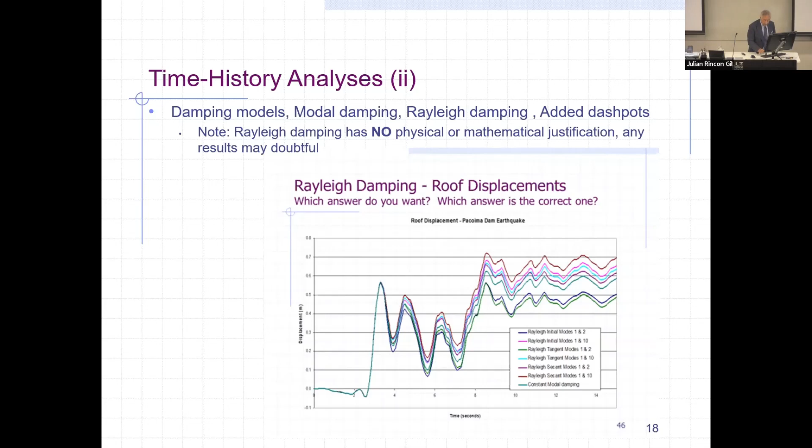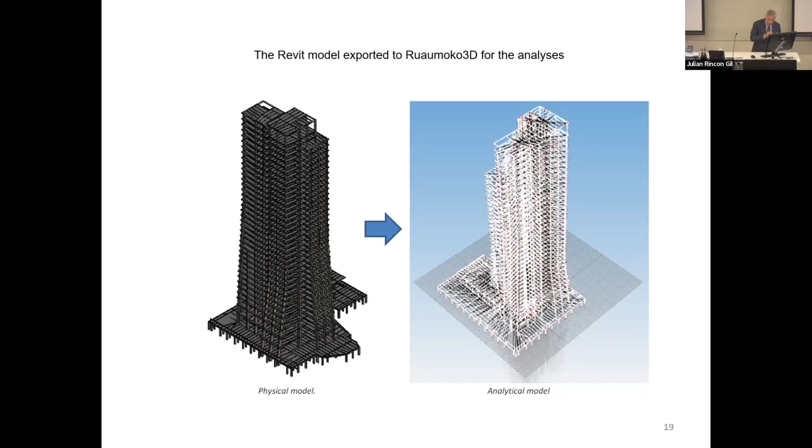There are certain types of analyses where you have no option. This is a building in Jakarta, which they wanted a performance-based evaluation for. That's the physical structure, and that's the computer model generated via ETABS, via Revit, etc. I'm sorry, the model's been turned through 180 degrees from the other one, I didn't realise that until this morning. That's the computer model.

There's this detail on the model for the upper part of the structure, the lower part of the structure. 8,000 odd nodes, 8,000 odd frame members, 4,000 odd finite elements. The structure's got 33,000 degrees of freedom. You're not going to do that by hand.

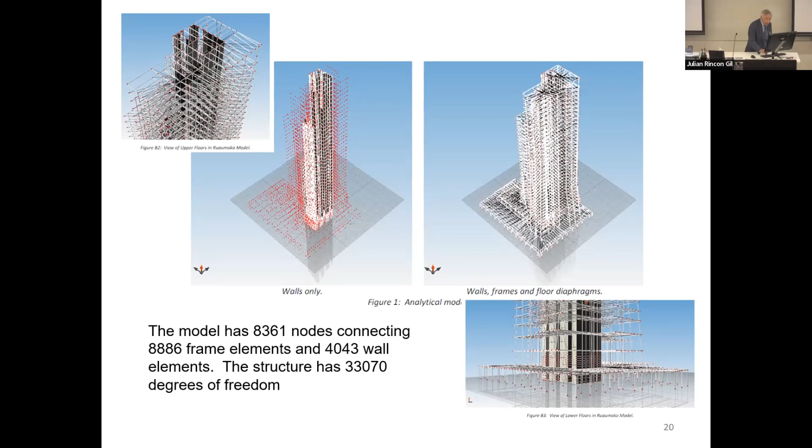But nevertheless, that was the model that was set up for the basic performance-based ASCE 41 evaluations. There's the odd little bit where the designer needs to go back and have a look at the members again. And at the MCE level, there are a few more, but basically speaking, the designers knew what the likely performance of the structure was. 16 analyses were required - 8 earthquakes, 2 directions, for each of those levels of analysis.

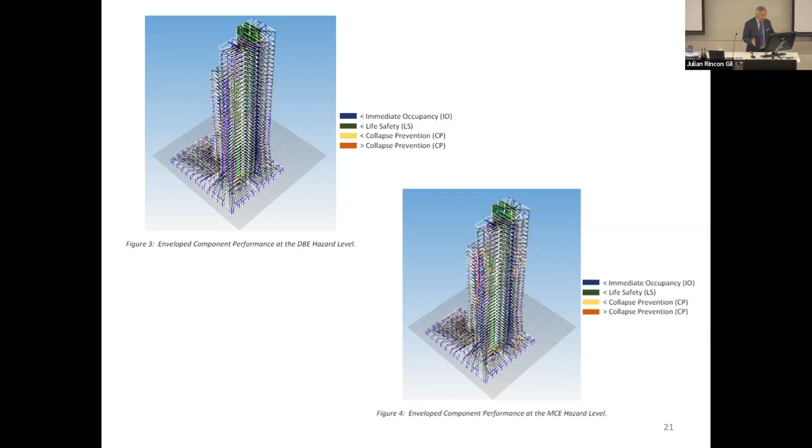We did the whole lot in 25 hours, using 3 computers, 3 desktops - and that's 2013, so computers are a bit faster now. Anyway, I think that's about all I've got to say. It's probably enough. We'll leave it at that. Thank you.